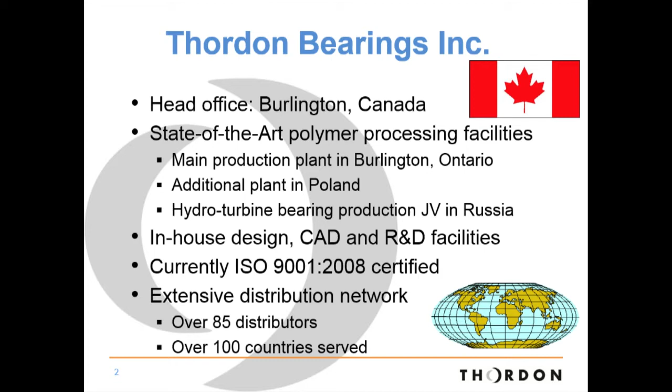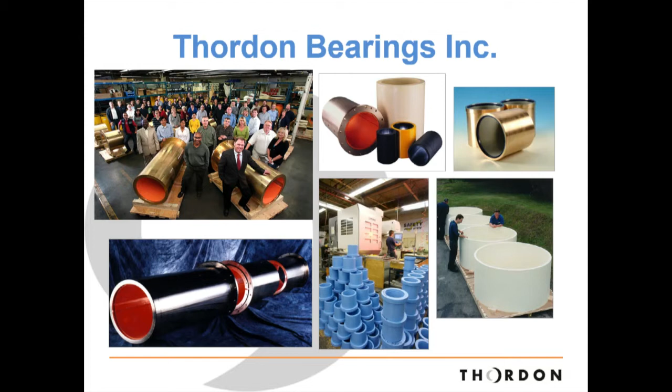These are the bearings that we manufacture, shown in the picture here. Most of these polymer bearings are used in the marine industry, for propeller shaft bearings and rudder bearings, but they're also used in hydroelectric plants, offshore oil vessels, wave and tidal energy, clean power generation, water treatment plants, vertical turbine pumps, and many other industrial applications. We've been producing these non-metallic bearings for over 35 years, creating a positive impact around the world's rivers, seas, and oceans. These bearings deliver long life without the use of oil and grease.

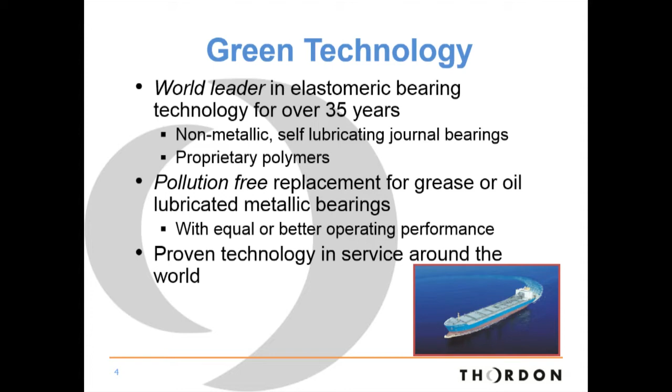Just a little about myself. I was born and raised in eastern Canada on the island of Newfoundland. That's where you can see our provincial bird, the Atlantic puffin, all along the coastal waters.

According to Environment Canada, chronic oil pollution coming from ships traveling off the east coast causes hundreds of thousands of seabirds to die every year. In the late 1990s, an estimated 300,000 seabirds were killed every year off Newfoundland's coast. The problem is oil doesn't mix with water, and it gets readily absorbed into the bird's feathers. When that happens, it decreases the bird's insulation, as well as their waterproofing and buoyancy. This inevitably leads to starvation or hypothermia. So just a little drop of oil can actually cause the death of birds in our oceans and seas.

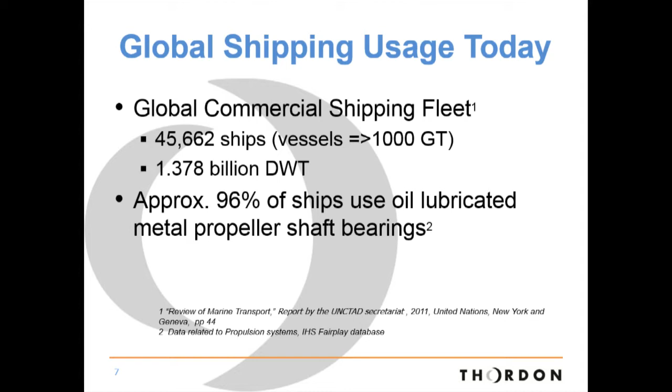Most of the world's commercial fleet uses what's called an oil lubricated propeller shaft bearing system. Let me explain a little bit more about what that is.

This is the part of the ship where the seawater interfaces with the ship. The yellow arrow points to a propeller shaft seal, the important part of an oil lubricated system. The purpose of the seal is to keep the mineral oil from leaking out and the seawater from leaking into the ship and contaminating the oil. Seawater ingress can cause serious damage to the metal bearings, and if oil leaks out, it can cause serious damage to the environment.

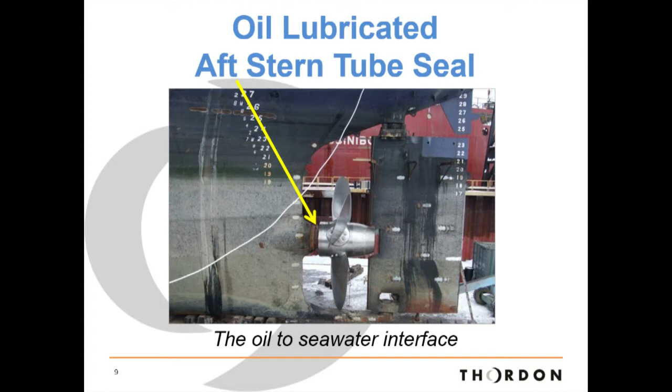Here's a different schematic showing another view. Basically you have the propeller shaft, a long shaft, and two bearings—a forward and an aft bearing—as well as two seals, one aft and one forward. The aft seal prevents oil from leaking out and water from coming in, and the forward seal prevents oil from leaking into the engine room. All this machinery operates below the waterline of the ship. There's typically 400 to 800 US gallons of oil in this particular stern tube system.

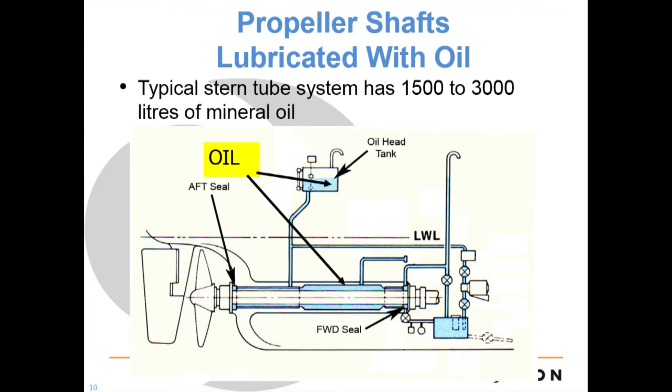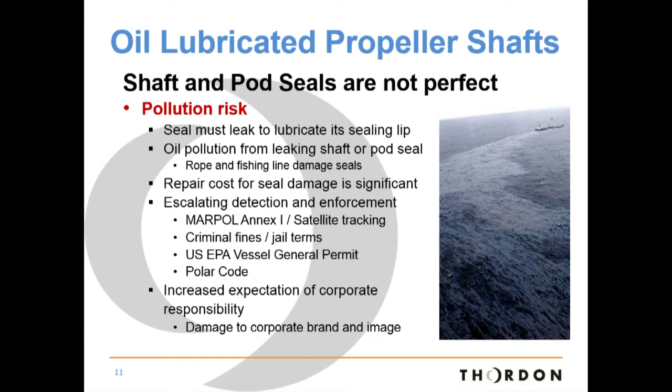So seals have been around for over 60 years, but they're not perfect. When they leak oil, there are serious consequences for the ship owner, especially in the last few years, as new regulations and tougher enforcement means that any oil leakage may bring fines and jail time to the ship owner.

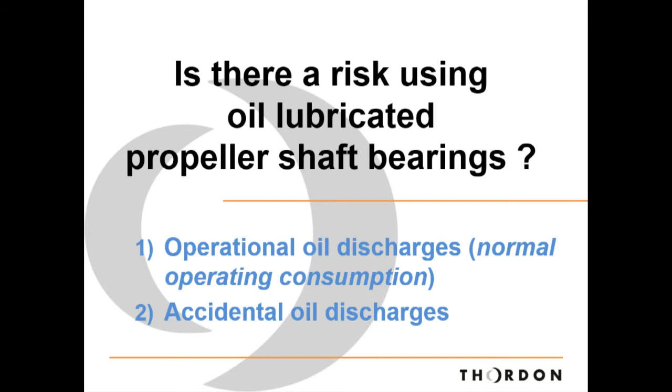So is there a risk? Well, there's operational oil discharges, which is the normal wear and tear of those seals, as well as accidental oil discharges. It's really hard to quantify how much oil leaks from a ship, as the ship's propulsion system is typically below the waterline, and of course the ship is constantly moving as well.

However, a research paper was written by a New York-based consulting firm and presented at the Arctic and Marine Oilspill Program conference in 2010. This was the first authoritative study done on commercial ship propeller shaft lubricating oil operational discharges.

The study was done on port oil discharges from ships, but the author estimates the amount of discharges at sea to be around 34 to 64 million US gallons of oil annually. Just to put that into perspective, it would be equivalent to 137 Exxon Valdez oil spills since the disaster in 1989.

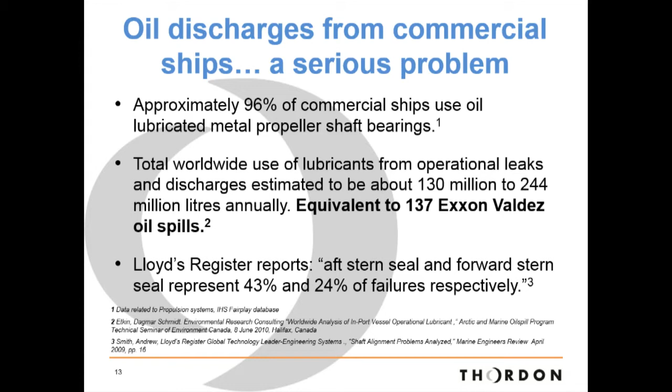So how does the oil leak out? A lot of times it's simply a fishing net or rope. It wraps around the shaft and damages the seal, and the oil leaks out. Or sometimes the seals themselves wear, or the propeller can hit the bottom of the ocean floor, and if it's operating in Arctic environments, it can hit the ice, and that causes increased oil to leak out.

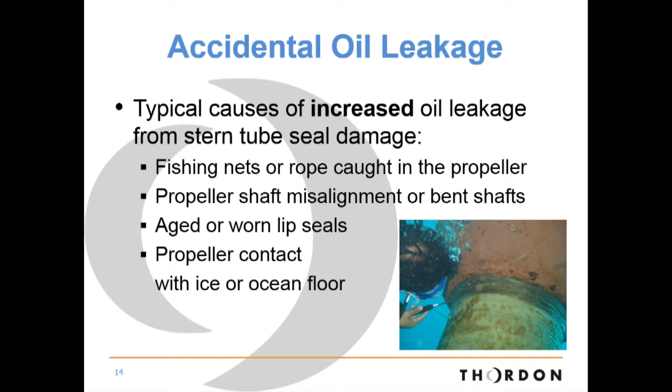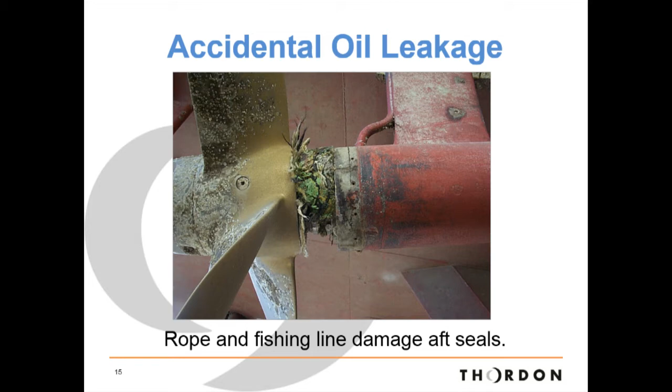The issue is that ships do not operate in a perfect world. Even if you have rope cutters to try and cut away the rope from collecting on a rotating shaft, it's amazing how often something as simple as a monofilament fishing line can damage the shaft seal and allow accidental oil leakage. That's a major headache for today's ship owners, and of course harmful to the environment. And that's one that must be reported to the US Coast Guard or Canadian Coast Guard immediately.

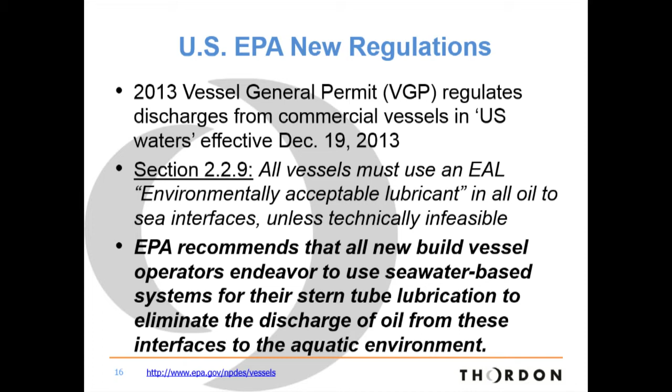The good thing is that new shipping regulations come into effect in a few months. This means that ships will need to use an environmentally acceptable lubricant, which can be biodegradable lubricants or seawater, used to lubricate the propeller shafts. One of the things the U.S. Environmental Protection Agency is stating in these new laws is that they're recommending that ship owners use seawater, and that works really well with our bearings.

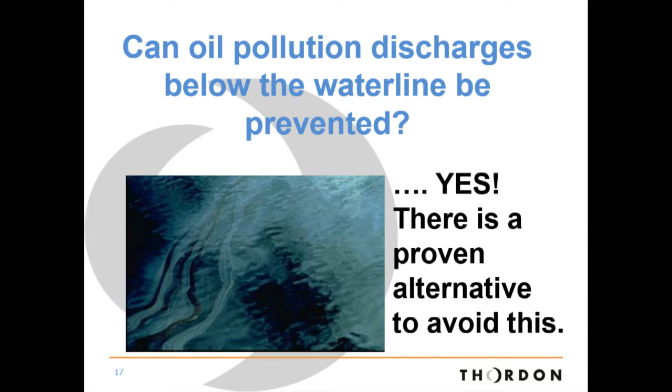So as you can see, commercial ship oil discharges below the waterline are a serious issue. But can they be eliminated from our ocean seas completely? Yes, they can. Prior to the 1950s, all ships used to use water lubricated propeller shaft bearings.

Seawater was used as the lubricant, and the bearings they used at that time was actually made from wood. It was called lignum vitae, and that was used to support the shaft. But the problem with that solution back then is that it was unreliable. No one knew when the bearings were going to wear out, and sometimes they had to change the bearings when they crossed the Atlantic Ocean.

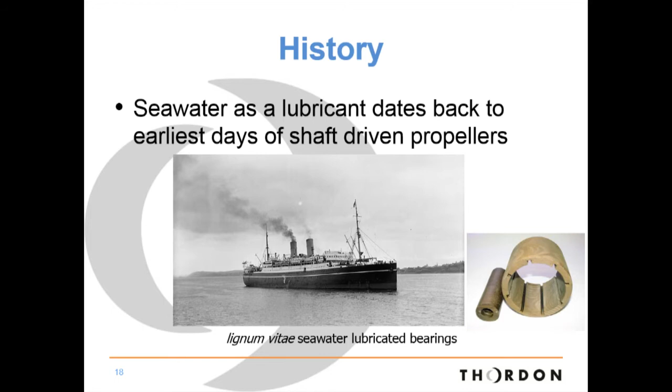However, navies and coast guards still use seawater lubricated propeller shaft bearings. Basically, they use it because if they take a hit, and if they were using an oil system and the oil leaked out, they would be stranded. It would be catastrophic. However, with water lubricated bearings, they don't have to worry about that seal keeping the oil in because it's lubricated with seawater. So both the US Navy and Canadian Navy, nuclear submarines, the Seawolf submarines for example, use seawater lubricated bearings manufactured by our company.

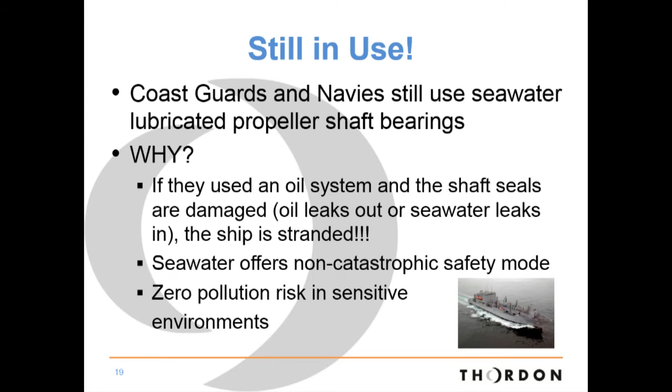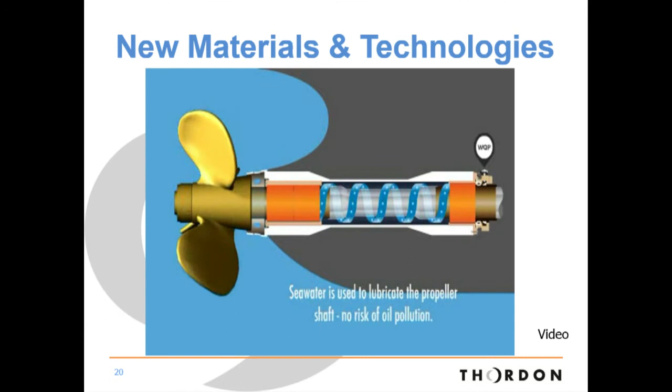So here's a little video that demonstrates how the system works. We basically have seawater coming in through the sea chest of the ship, and we actually clean the seawater and make sure that there's no abrasives in the water. Because we now have clean water, the bearings will last longer. So we pump the seawater through the stern tube of the ship, and then basically there's no seal on the end, and the seawater just goes back into the ocean.

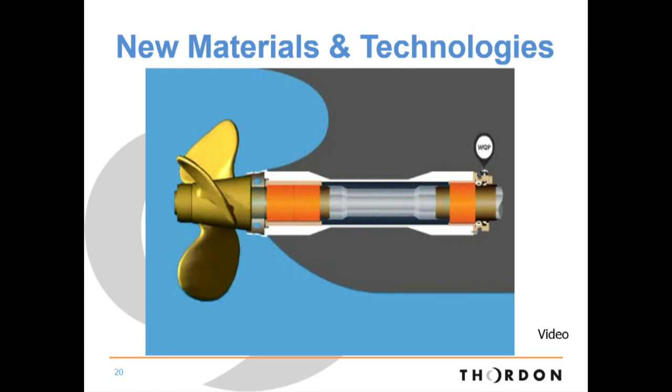One of the important things about the system is that it's seawater, which means highly corrosive. So we have to ensure the stern tube is painted with anti-corrosion paint, and the propeller shaft needs to be coated with an anti-corrosion coating that's flexible as well, because when a ship is in the water, the shaft does flex.

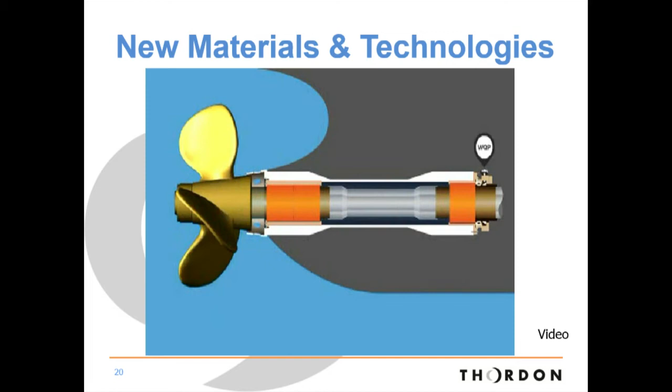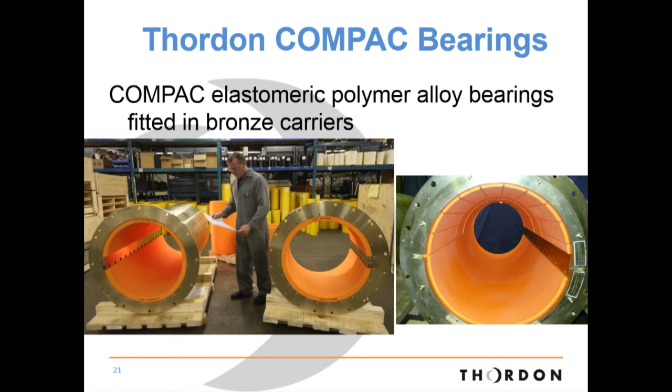A water lubricated propeller shaft bearing system is actually technically equivalent to an oil system, and it fits in the same space as well. So these are the bearings that we manufacture. They're a non-metallic bearing called an elastomeric polymer, a proprietary ingredient, and they operate without the use of oil. We call this orange bearing a COMPAC bearing, and they're used globally in navies, coast guards, and commercial ships.

So this is not new technology. Currently we have over 600 commercial ships fitted with seawater lubricated shaft bearings, and we're seeing the number of inquiries grow for this zero pollution solution every week. I love that, a zero pollution solution - it has a good ring to it, doesn't it? As you can see, there's several users that are American companies, Canadian, Chinese.

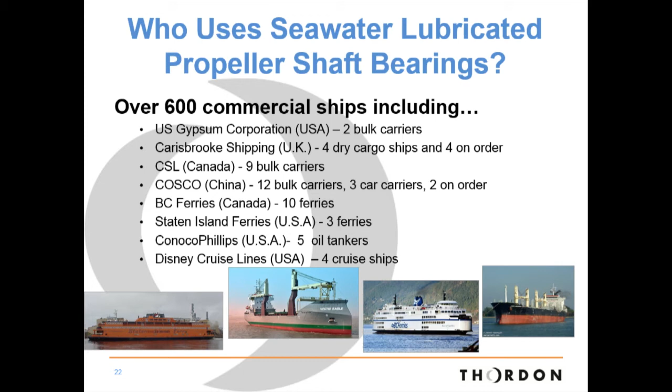As you know, cruise ships travel to environmentally sensitive areas, so any oil leakage would be a real concern. One of the first ships we installed seawater lubricated bearings on was the Grand Princess, owned by Princess Cruises at the time, in 1998. Princess got bought out by Carnival Corporation based in Miami, and they now have 16 cruise ships running with this system, with 2 more on order.

The projected life of this bearing is equivalent to a metal bearing, so it's going to be around 15 to 20 years. Princess Cruises knows that it works, and another cruise company in Miami, Disney Cruise Lines, is using the same system as well.

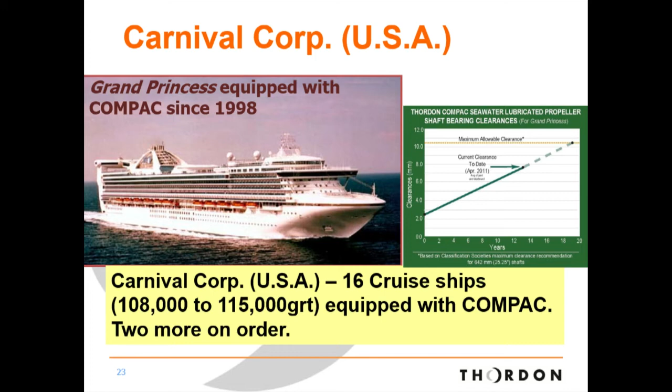So let's take a look at the pros and cons of a seawater lubricated system. Commercial ships have been using this new design since the late 1990s with very few issues. It can save the ship owner money because there's no seal maintenance costs, no seal used at the aft end of the ship, no oil storage, and you don't have to dispose of the oil. You don't have any risk of pollution fines, and you don't have to do any emergency seal repairs if you're using our system.

As I mentioned earlier, the negative part is that you do have to protect the propeller shaft and the stern tube of the ship with corrosion protection, and that may increase the upfront cost. However, for a standard size bulk carrier or oil tanker, the payback period is about 4 years, so it's certainly improved from the past. And of course, we already have 600 commercial ship owners that use this system.

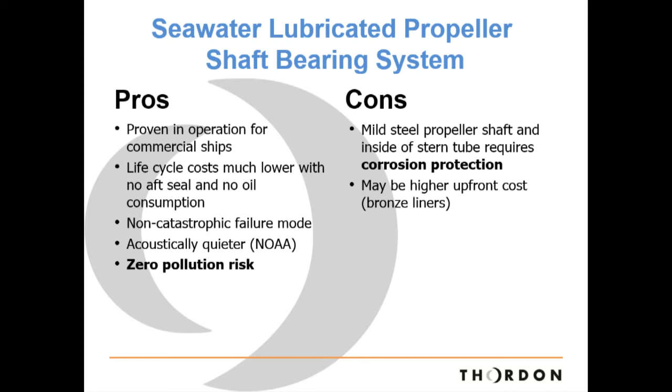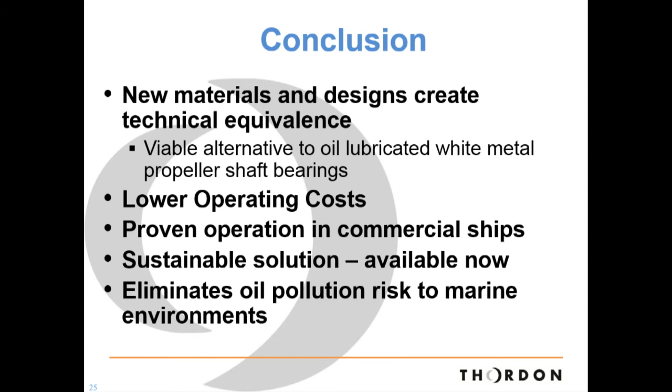So today, new zero pollution Thordon bearing systems operate interchangeably in the same space as an oil lubricated system. These seawater systems have been widely used around the world in all parts, and the usage eliminates any source of oil pollution, having a positive impact on their seas and oceans. I think the future will likely bring change to the shipping industry, and we're ready to meet it. And those seabirds I mentioned earlier, if you ever go to visit Newfoundland, they'll be there, and you can take your pretty picture as well.